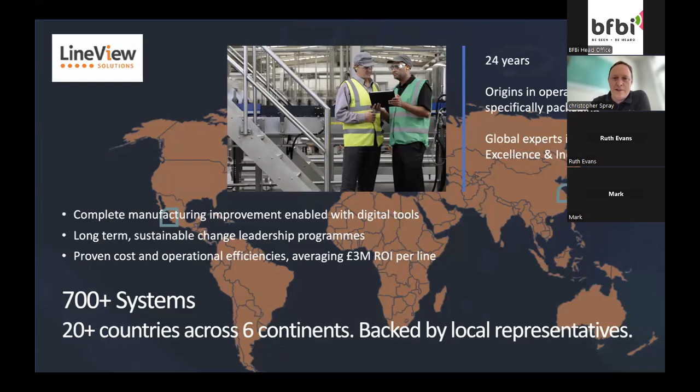Over 700 systems now in the world, 20 countries, and we've also got local representatives that work with us, a big team and growing team. This is just the UK team - we now have people in the States as well, and in the Middle East and the Far East. But you'll get access to this and be able to see the credentials of our team.

So a quick quiz - I'd really love, let's just do question 1. I'd just like to understand people's general appreciation and understanding of line balancing. Some of you might think these are Mickey Mouse questions, but I just want to make sure everyone's on the same page. So, what is a bottleneck machine? I'd love ideas and thoughts about that in the chat if you could.

The slower one. Yeah. Any other thoughts?

Great, Mark. The critical asset which dictates the speed of the line completely - the bottleneck machine. Yeah, great responses. So typically you'll have a machine on the line that is often the most expensive, and that determines the whole rate of the production line. It's really important we keep that machine running. If it stops, we're not winning. Great. Slowest machine, critical machine. Brilliant. Thank you. Yeah, causal loss.

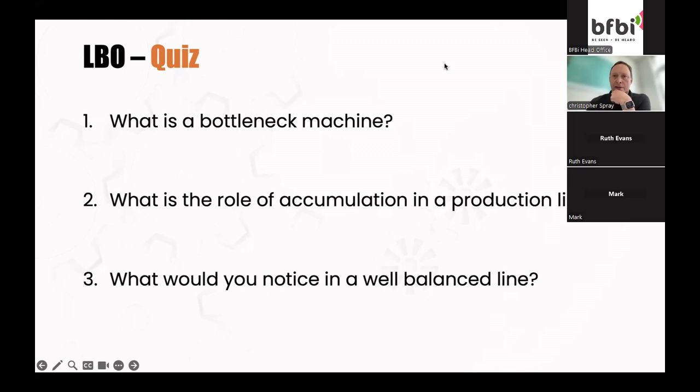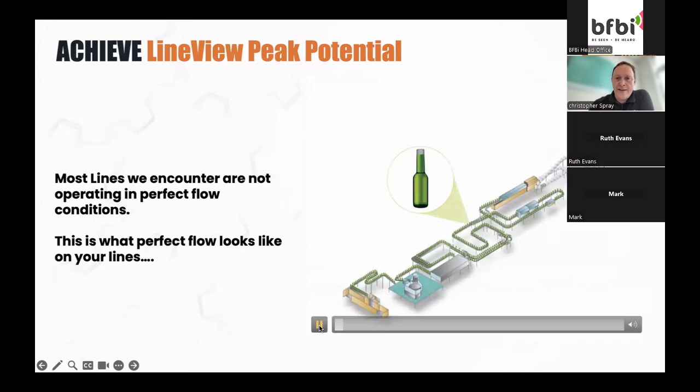Thank you for that. Please continue to, if you're thinking, chuck it in the chat. Okay, thank you. So as we said, most lines we encounter as Lineview are not in perfect flow, and our view of perfect flow is something like this as an analogy. So if you imagine a production line with a small bottle running through the line, and the conveyors act as buffers, or the accumulation conveyors work as buffers, and you have varying machines down the line. You'll notice the constrictions increase as we go down the line.

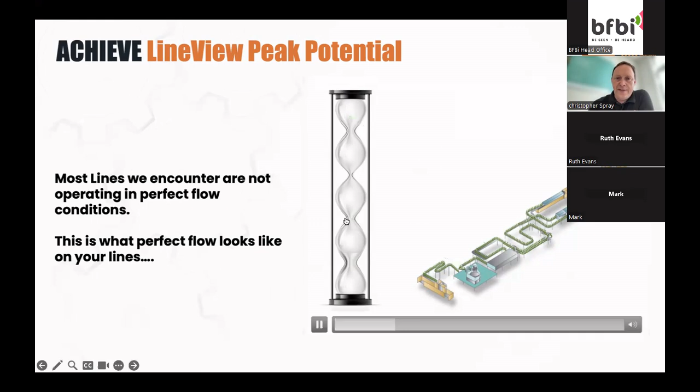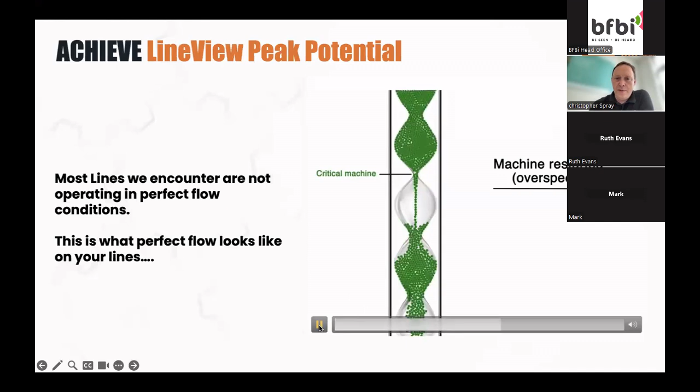So as we get into flow conditions, we have a condition called - we have the critical machine, the nominal state. So it's flowing through the line, but if we get a stop further down, it builds back. We start building into this buffer, but still the critical machine is flowing. It may stop another upstream machine and build back to the point where in a moment you'll see the machine below empties as fast as possible to maintain the critical machine in its nominal state. And we get back to the line just flowing through.

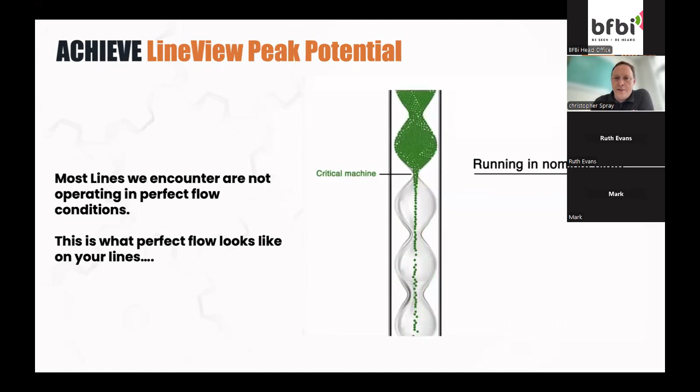And you'll notice above the constriction, we're doing as much as possible to maintain as much of a buffer ahead of the critical machine as possible. So that's perfect flow.

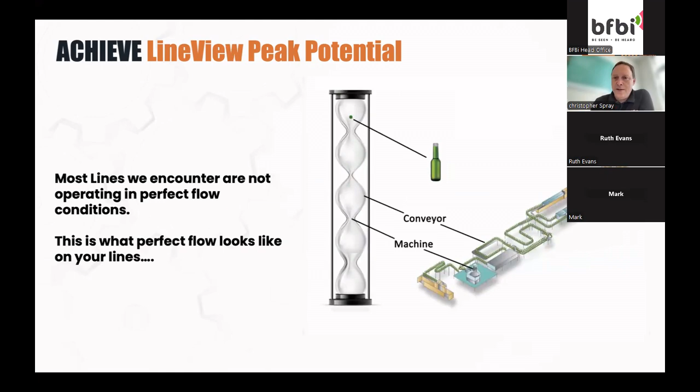But often machines aren't locked down, so they're commissioned, and then the engineers and operators start to have a nice fiddle, and the original settings aren't taken into consideration. I would say, and I'd probably get shot by the OEMs for this, but they're not great at machine integration. They're really good at producing great quality assets, but when you bring them together in a dynamic situation, there's little understood, particularly by the commissioning engineers, about how to manage this. And what they're often trying to do is manage the individual assets rather than the whole line.

Engineers change setups, often in response to problems. I was on a line yesterday, and there was clearly an extra 2 or 3 minutes of running available ahead of the filler when a bottle blower fell down. But at some point, the engineers had moved the stop point way down the line, and that was causing a problem.

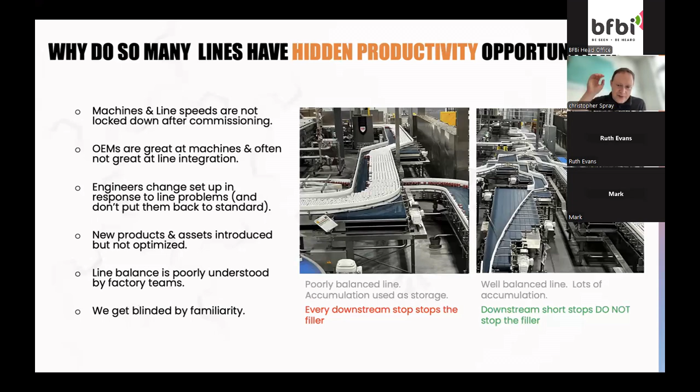So the more we educate our people, the better. And I guess the final piece is, we do get blinded by familiarity. Maybe we come onto a production line, that's all we've known. So I think there's a big piece to educate. And as I say, 2 to 5%, it's worth going at for very little effort often.

So what we do, we often go into the field and we find these quick wins. We've been applying this to hundreds of production lines. Often no capital expenditure required, just a little bit of control engineering to get the best.

And why is it so critical? We've mentioned some of these things already in the quiz, but when you flow, when it's efficient, it's optimal speed, the critical machine keeps running at its design efficiency. And we find these bottlenecks regularly, which add cost.

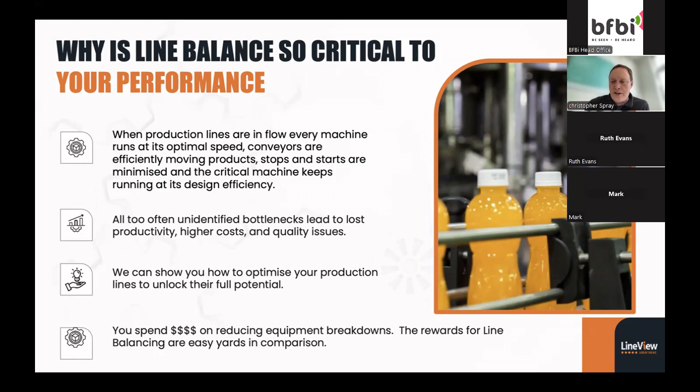So let's think a little bit about how we can look at and understand some of the issues we see on production lines.

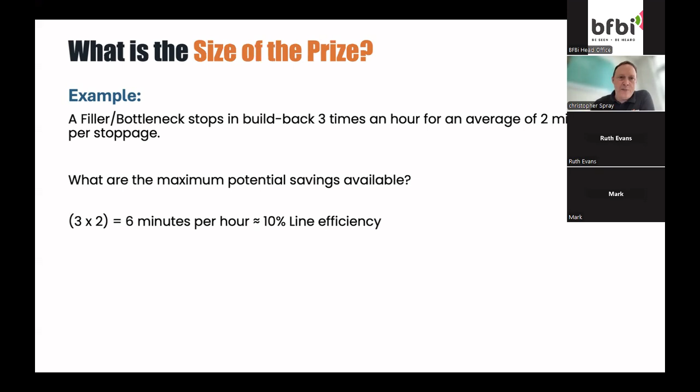What's the size of the prize? Let's give you an example here. Imagine a bottleneck machine stops 3 times an hour for 2 minutes. Maximum potential savings available: 10%. So a 10% loss because the bottleneck is regularly being stopped by up and downstream machines. So that's what we're targeting.

Imagine we can get at 50% of that. Some of the lines we work on running at 2,000 cans a minute, 1% is around about £1 million of performance, of potential improvement. And many can lines around the world are capacity constrained at the moment. So potentially big money here to save a few minutes here and there every hour.

What's it worth to you? Are you aware of what a 1% improvement is worth to you? It's a question. Often we don't get an answer back from customers when we ask them.

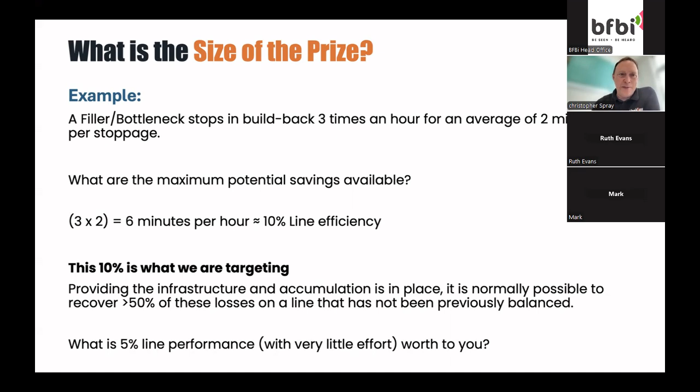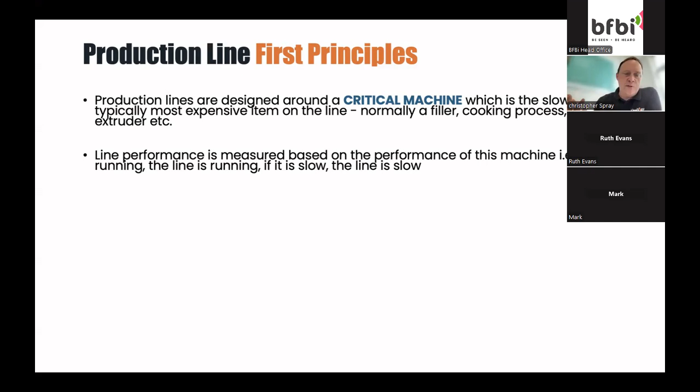Okay, let's just look at some of the principles. So production design, we're designing around this critical machine. It's the slowest, typically the most expensive item on the line, normally a filler. I've seen cooking processes, extruding processes in meat and pet food, often the bottleneck. And we measure that around the slowest machine.

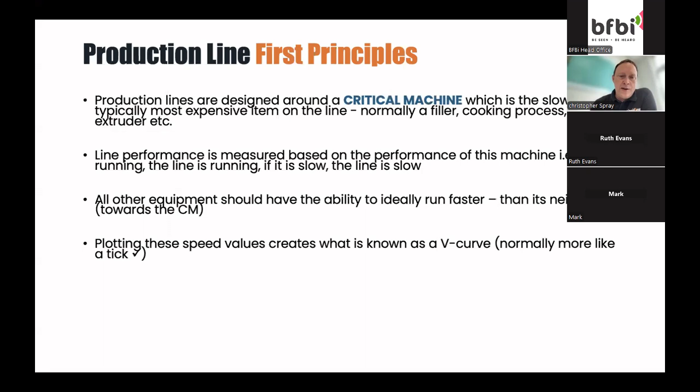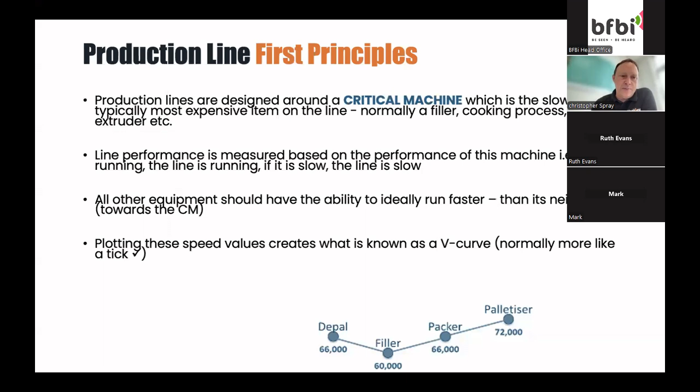And we know about V-curves. We've mentioned V-curves in the quiz. All equipment coming into and out of the line should run faster than its neighbor. V-curves are kind of generally understood. And if we plot these speeds, let's think about a line regularly, 10% uplift for each machine you go down and each machine you go up from the critical machine. There's our V-curve. And then we build in this accumulation as well to try and stop upstream and downstream machines impacting.

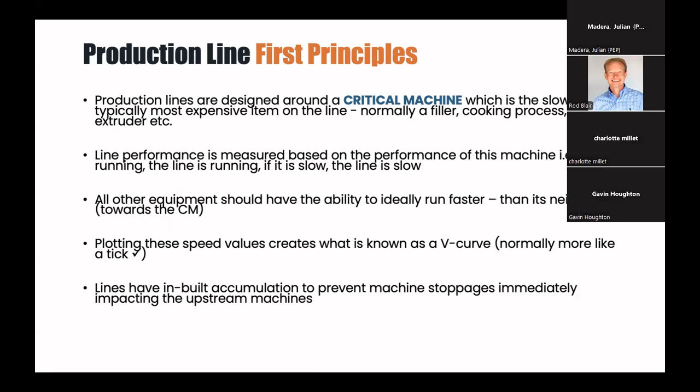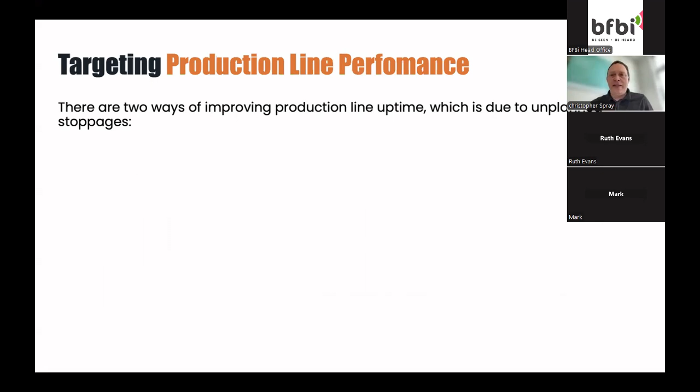So there's 2 ways we can think about, and again, just building the case for line balancing, think about maintaining uptime. We can prevent machine downtime. We all have engineering teams. We all work on increasing mean time between failure, reducing mean time to repair through our training. There's a lot of investment in that area.

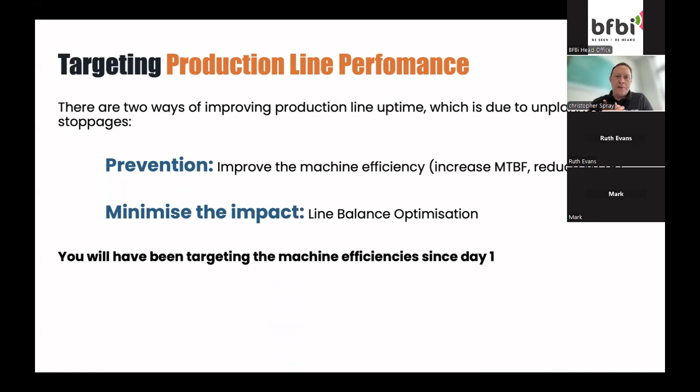But then through line balancing, we can minimize the impact because lines are always going to stop. They're always going to, at some point, have breaks and cycles. So many of us spend a lot of work on this prevention work, and I think we could spend an awful lot more on this line balancing work. I think the food industry can teach the beverage industry a lot about this as well.

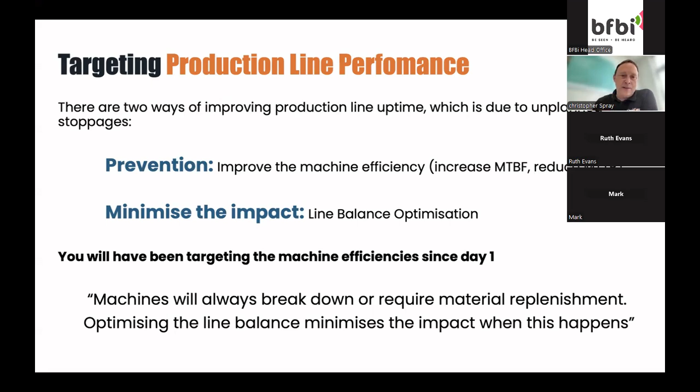So yeah, machines always break down. Optimizing the line balance minimizes the impact. So, covering both bases.

What's our goal of line balancing? Well, 3 basic goals. So maintain the critical machine. I was in Texas recently, and a kind of cowboy leader of a plant—well, he was an actual cowboy. He said, 'If you ain't spinning, you ain't winning,' and that kind of stuck with me.

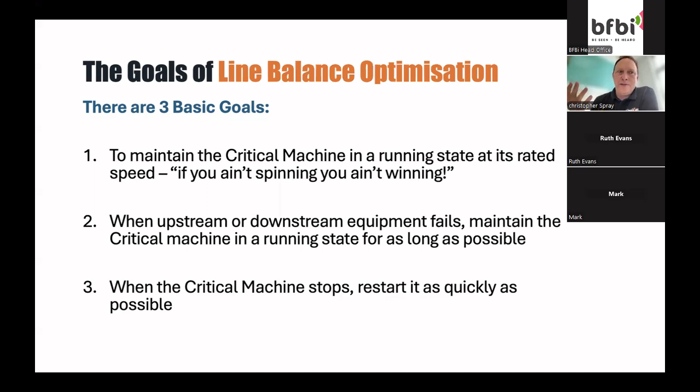And then upstream and downstream equipment, when that fails, you maintain the critical machine, and then if the critical machine stops, this is the other vital part, we restart it as fast as possible. I've been working in a plant the last couple of days where it took 2 minutes to restart the filler after a labeler restarted. Well, we can halve that. We can save a minute every stop, and there are 5 stops an hour. 5 minutes gained, nearly 10%.

One area we don't think about as much as we should is, because we all think about automation and we all think we can do something there, but what about response times?

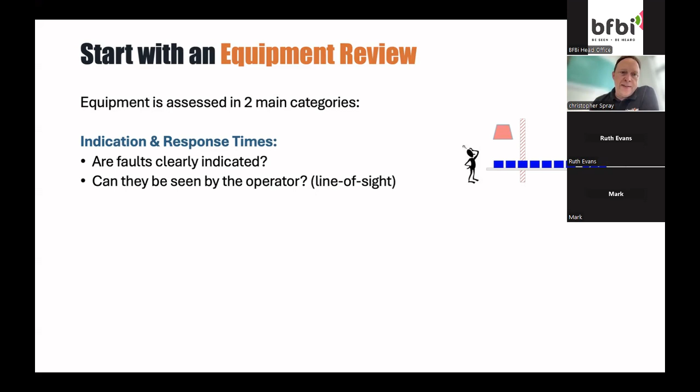Are faults clearly indicated on the lines? I go to many lines, and we're putting fewer and fewer people on lines. Are the andons working really well? Are they in the right place for the operator so they can really understand where the problem is? Can they be seen in a line of sight? And do they identify where the problem really is so the operator can get mean time to repair down?

Often on lines, when lines are moved around, the ergonomics of the operator are not considered in terms of the problems that might occur. So you see steps over lines, and you see restarts 100 meters away from where the problems are occurring on the line.

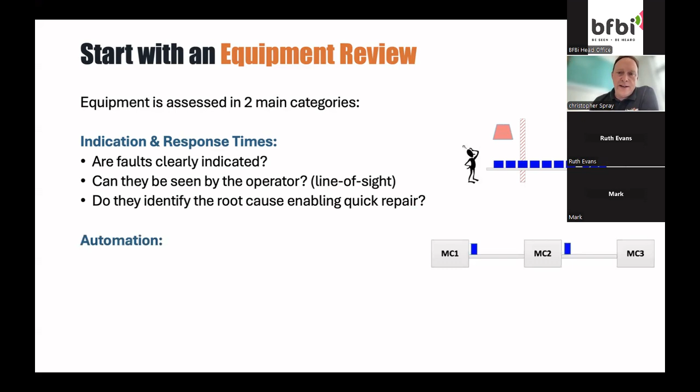So it's really important to think about response times and where problems are being indicated. And then, of course, in terms of automation, is your equipment networked? Are the machines and conveyors capable of variable speeds? And do you have minimal operator intervention? So speed set points are locked down to avoid this movement over time.

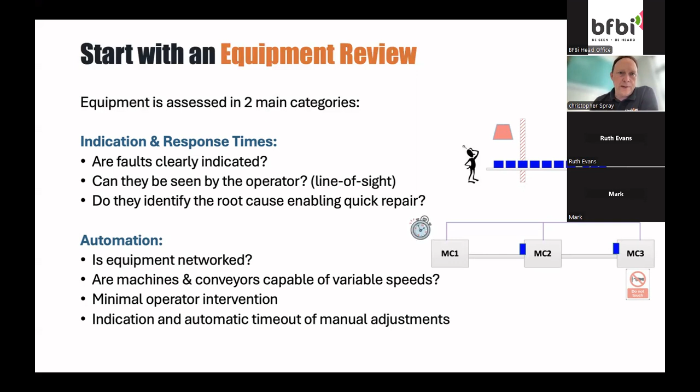There's a creeping thousand cuts of death when it comes to line balance optimization. And then have you got indications and automatic timeouts of manual adjustments? Quite a lot of plants now are allowing a small amount of adjustment on the front line, but at the end of the shift it just reverts back to the original settings again. So people have ability within shift to make adjustments, but not over the whole system over the whole year. So it's almost always important to start with thinking about your equipment.

And then we start to think about automation and maintaining the critical machine in running mode, this accumulation question. So we think about dynamic accumulation, and I've got two pictures here on the right, similar to earlier. The top picture there has very little dynamic accumulation in it.

It's really using the conveyors as a store of cans rather than a transport device. So if we sped up those conveyors, there could be far more ability for that line to recover fast or stop the critical machine breaking. Down below, there's much more space on the line.

So just to indicate that, if you've got a non-optimized line, often half of the conveyors are full of product as the line is running. So it's a really simple test to me - whenever I walk around a line, that's the first thing I look at: how full are the conveyors in normal running?

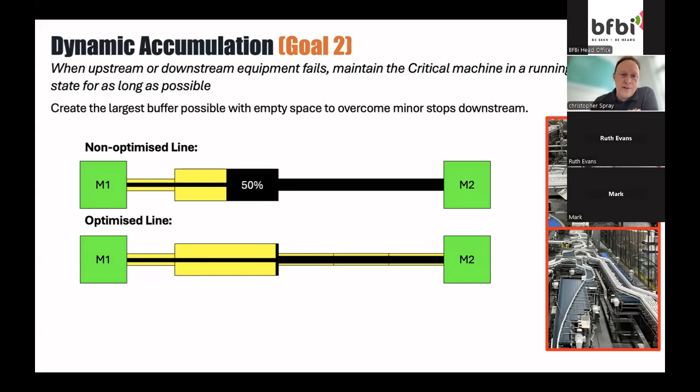In an unoptimized line, you've often got very little conveyor, so as in the hourglass earlier, you've got real flow straight down to the secondary machine. So what happens in a stoppage situation?

Well, we've already stopped M1 in the non-optimized line, and we've got twice the amount of accumulation available to us in the second situation there. So that's kind of line balance 101. How much dynamic accumulation have you got?

Often engineers will turn conveyors down to stop bottles falling, rather than dealing with transfer issues or wear issues on conveyors. That sort of thing moves us off our center lines. So the key thing is transport, not storage. Storage is a complete waste of time and money - we may as well just block machines together.

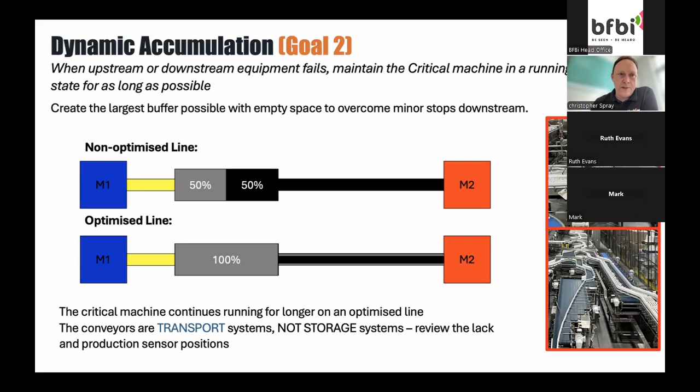Now let's think about cascade control. I'm not sure if everyone's aware of cascade control and how it works, and this is about restarting your critical machine as soon as possible. As I said earlier, I've recently been on a line - it took 2 minutes to restart a filler after a labeler restarted. The labeler actually stopped waiting for bottles from the filler.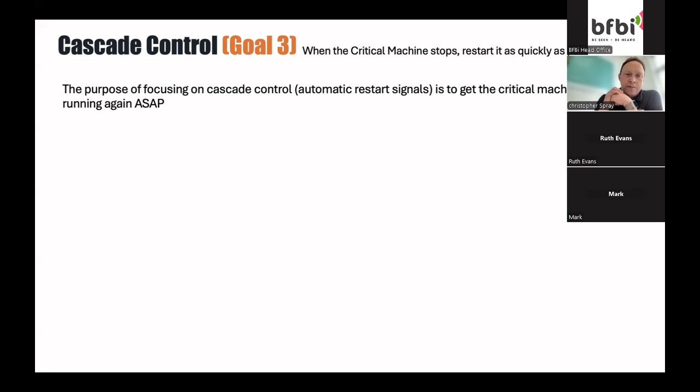So what you can do is cascade control. Let's think about this in brief. Imagine you've got two lines here - M2 is blocked, broken, it's red, okay, and M1 is blue, it is built back. Both lines are the same, they're both built back.

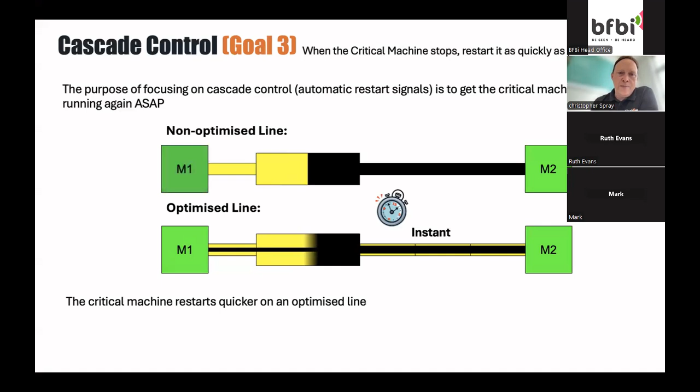Let's see what happens. In an optimized line, M1 started straight away, whereas M1 hasn't started on the non-optimized line until you're about 50%. So the second line recovers so much quicker back to its nominal position, and M1 has an extra, often more than 60 seconds of running time.

So cascade control, often not quite understood by controls engineers in factories, because you need some safeties to ensure that you don't build back into your asset. But cascade control is highly possible on most production lines today, and it's a real winner to keep the critical machine running after a stoppage and starting it as soon as possible.

So as a guideline, earlier I talked about transport, storage and conveyors. As a guideline, after a restart, if you see a gap in your conveyors waiting for product to run by, there is always scope for improvement. Just a very quick thought there when you're looking around your lines.

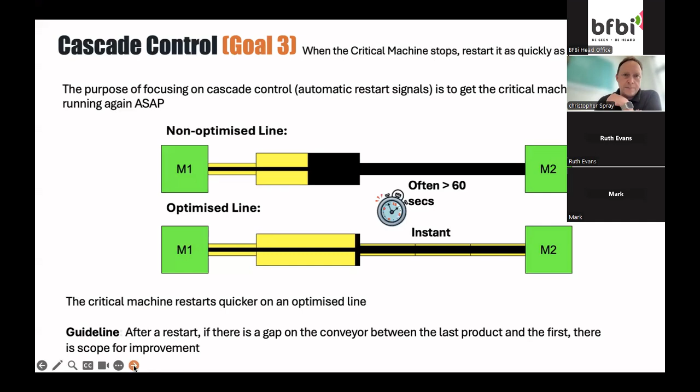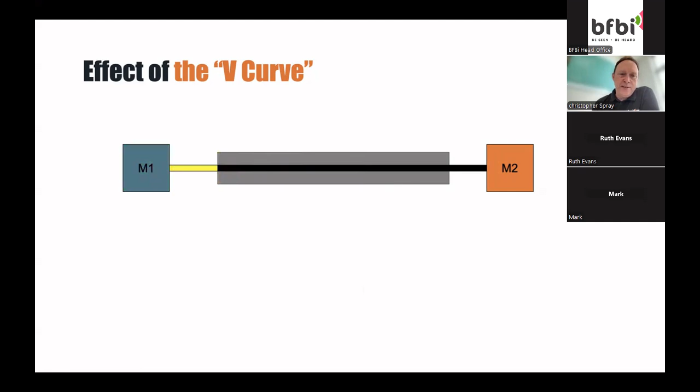Let's just think about the effect of the V curve. I think everybody is aware of the V curve, but imagine two lines running. The second line stops, and the first machine goes into build back. So there we are, we've built back to the main machine.

When we're optimized, the downstream machine has a much higher overspeed capacity. Now, people often say 10%, but I say work at the design speed, the maximum design speed of your downstream machines, to clear this buffer as fast as possible. Quite often there's a lot more capability in the machines than the OEMs will account for, because they've sold you a certain speed on your line.

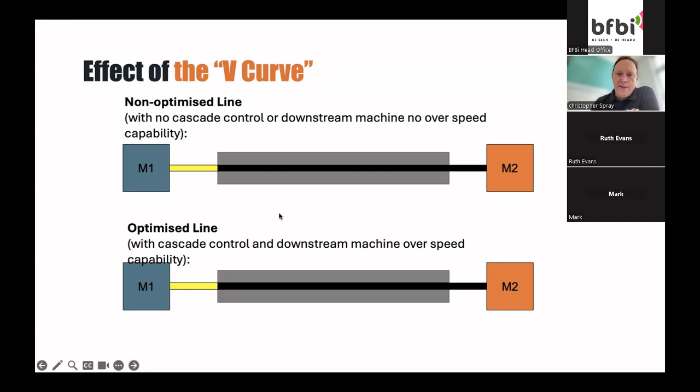But if we look at an optimized line versus a non-optimized line, we'll see that the rate of improvement back to the nominal condition is much better. So what we end up with in the first is very little dynamic accumulation available, because the second machine there is not running very much higher than the first machine in terms of speed.

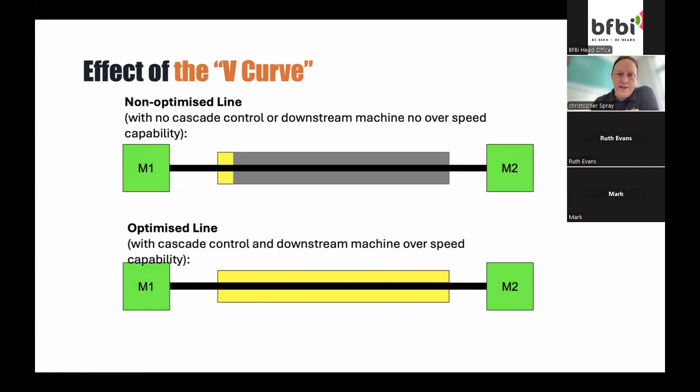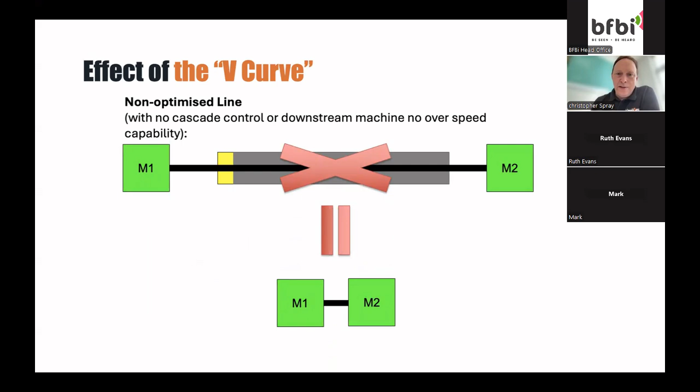Often we can get back to nominal position much faster than we think we can. Sometimes it takes an hour, and actually, if you increase the downstream machine speeds, it's a real winner. So let's not have speeds very similar across our lines. Let's get these V curves as V as they possibly can be, whilst maintaining the reliability of our downstream machines.

Just a factor here about mean time between failure and mean time to repair, because what we're trying to do in line balance is, firstly, we're trying to make our mean time to repair less than our accumulation space. So thinking about that, essentially we can work out our dynamic accumulation, our accumulation space, by looking at the amount of capacity on our line and the speed of the feeding machine. We need to make that more than the mean time to repair.

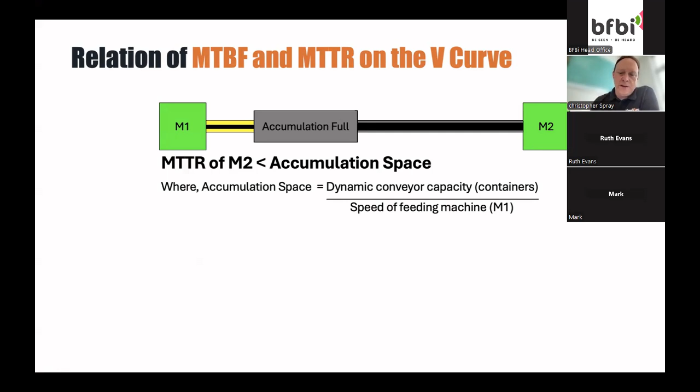So if M2 goes down, it will normally come up faster than the accumulation will fill up. And then the other thing to think about is to ensure that the mean time between failure of the second machine is greater than the recovery time back to nominal state. So if your machine's stopping every 10 minutes, you need to get back to nominal state in less than 10 minutes, and then you will keep M1 running. So it's also important to work in conjunction with looking at mean time between failure, mean time to repair, to design the right amount of accumulation in your line.

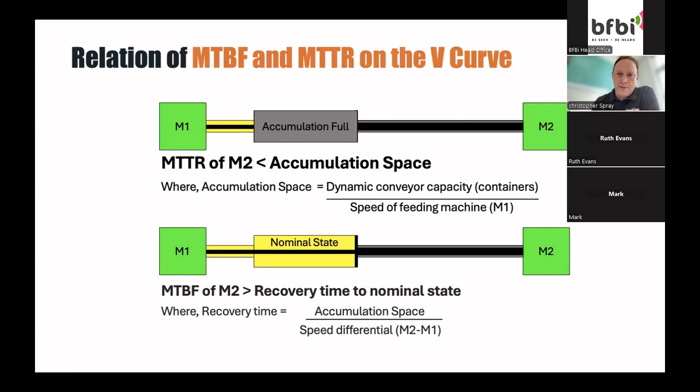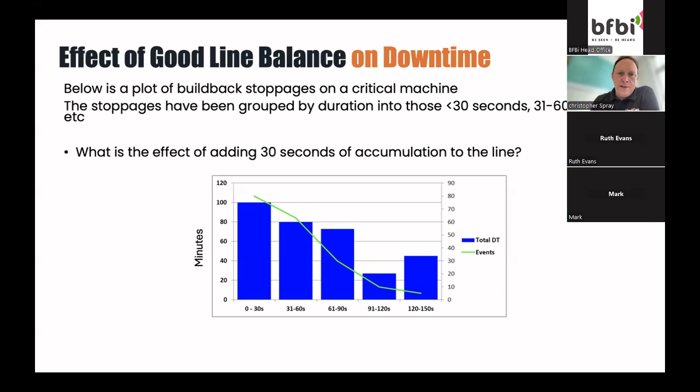Let's just think about the effect of good line balance. So a plot below, just imagine that you've got build back stoppages on a critical machine, and we've grouped these from a typical line. So 0 to 30 second stops, 100 minutes a day. If we added 30 seconds of accumulation to the production line, effectively we remove that 100 minutes of downtime and we move everything to the left. So all the stoppages less than 30 seconds disappear from the line.

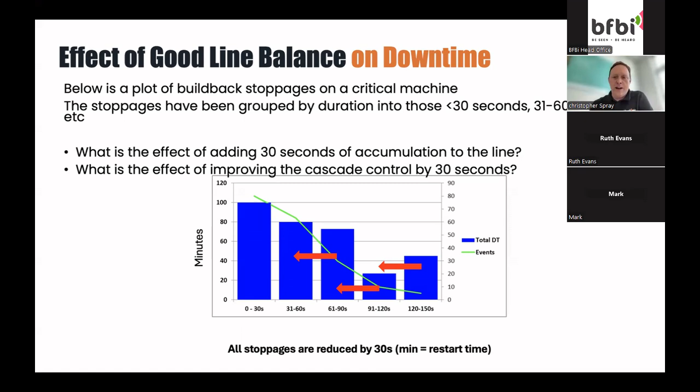And then the idea of restarting machines much quicker, if we improve that by 30 seconds, we actually move everything to the left. That takes 30 seconds off every single stoppage, which then improves throughput dramatically as well. So good practice on line balancing is to understand mean time between failure, mean time to repair, and really understand all these different factors that dynamically create a better solution.

We talked about this a little bit earlier.

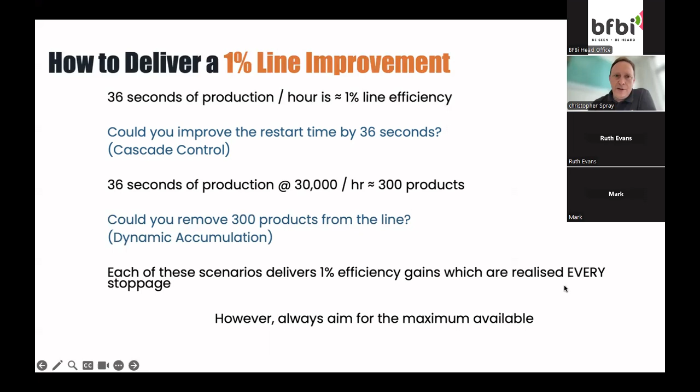But 1% of efficiency on a line is 36 seconds. So if we can, and it's also 30,000 an hour, that's an extra 300 products out of the line. We could easily remove often 300 products from the line to increase dynamic accumulation and increase the amount of efficiency we're getting. Often we see on dynamic accumulation, you could fit a whole lot more product on your production lines in a build back situation to actually increase the amount of accumulation available, if that makes sense.

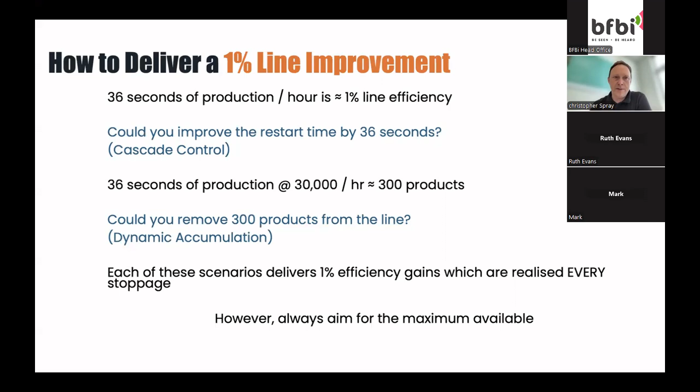So just some of the key indicators, I've given you a few indicators of what a great balanced line looks like. So it's good to start reviewing this. When a problem occurs, is it clearly indicated? Can the operator see the root cause?

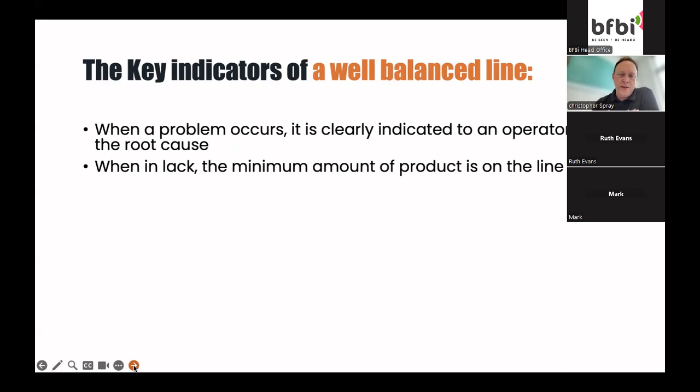When you're in lack, so when you haven't got product available to run through an asset, is there the minimum amount of product on that line? Could you actually run a bit more through the machine and keep the machine running a little bit longer? When you're building back the line, have you got the maximum amount of product on the line downstream of your machine?

Often there's an opportunity there. During production, we've got this transport situation, not a storage situation, in your line. And when a breakdown occurs, everything runs for as long as possible. We're not going into half speed early. We're just trying to run as long as we possibly can.

And this, when restarting, everything restarts as quickly as possible. It can be instant. You can block a labeler and a filler with accumulation between them, so that as soon as a labeler starts, a filler restarts. That can be done with the right control in place and the right safety measures.

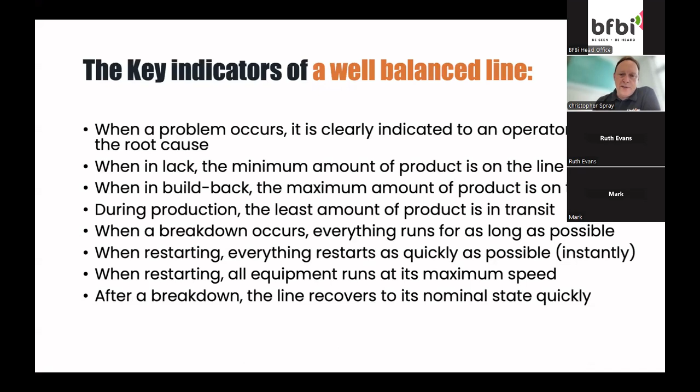And then moving to maximum speed, not just this 10%. Everyone has 10% in terms of the V-curve in the head. And then after a breakdown, the line recovers to its nominal state quickly. So they're the key indicators.

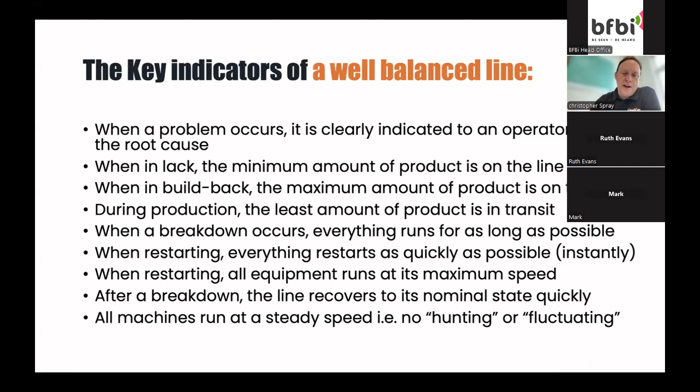We have some more. Once we've got back to our steady state, get the machines down to a steady speed, no hunting and fluctuating. We quite often see machines hunting up and down, above and below the critical machine speed. Machines don't like doing that. They like to run a nice consistent flow.

And some of the characteristics of a well-balanced line: they run at rated speed, they operate in automatic with minimum input, the stoppages are indicated clearly. They're much more resilient, you get much less variability, and they restart faster after a breakdown, and they recover to their nominal state very quickly. Things we've discussed already.

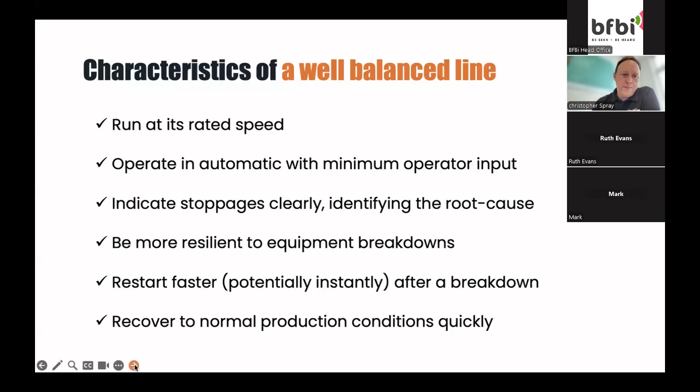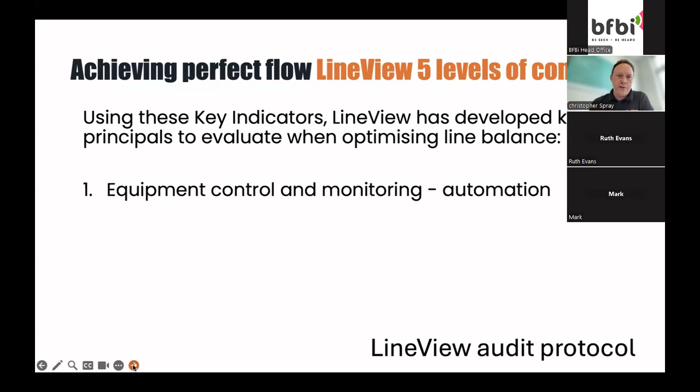Okay, so at LineView, what we do is we incorporate everything I've spoken about into what we call the 5 levels of control. We use these 5 levels of control as key indicators, and we've developed these principles to evaluate a line, and we have a program around this around the world. But our key principles are looking at equipment control and monitoring, looking at the speed, the line balance, looking at the conveyors, optimizing them, looking at cascade, and looking at automatic linking of speeds. And we can review those and audit those with you and actually give you a score based on that.

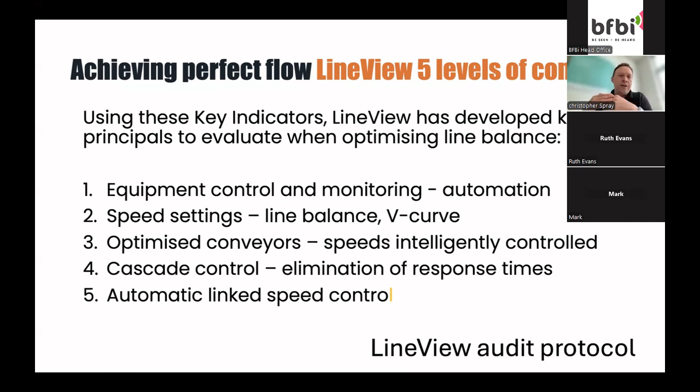Just a little comment though, if your line is running in the 80s and 90s, the opportunities are going to be fewer because you've got fewer stoppages. Lines running in their 50s to 70s is really kind of the sweet spot for line balancing, because you're then kind of kicking it on. If you think about it, you will cannibalize the improvements if you're actually working an asset and improving an asset. But generally, that 50 to 70 sweet spot is where most lines generally are running.

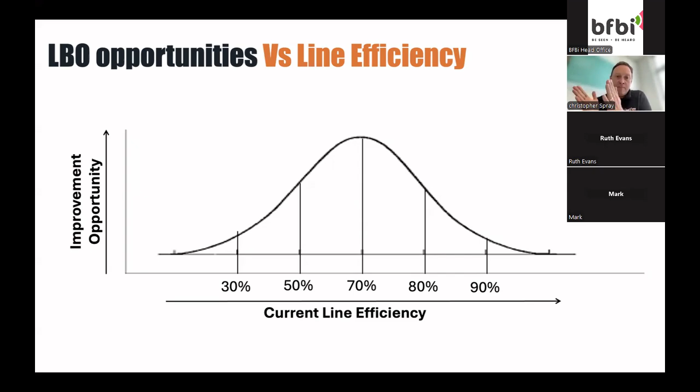So I'm just conscious of time, and I want to make sure there's some time for questions. But we do have a program around this. We've got some real experts, but our zeal is to teach a man or woman to fish. So we bring our people to your people and train them in these 5 levels of control, train them in perfect flow, and then do some interventions on production lines with a couple of SKUs. Obviously, line balance and different SKUs and different bottle sizes change. And then sticking with you with a regular review of this 5 levels of control process. So, real coaching. There's so much churn and turnover in industry at the moment, it's really important to keep this knowledge fresh. I think the average time of a team leader on a production line right now is 18 months to 3 years, so maintaining that knowledge in-house is really important. And I think doing that in relationship is important too.

What we also do is set baseline scores so they can be referred back to, so we can see whether a line has moved off its target. We often use our software to do that, but we can use others as well. And then we do have automation capability within our remit as well. We have a number of people who can come in and help you actually drive these issues out. Automation is a really scarce resource within manufacturing right now, and we have access and can help you move this very quickly.